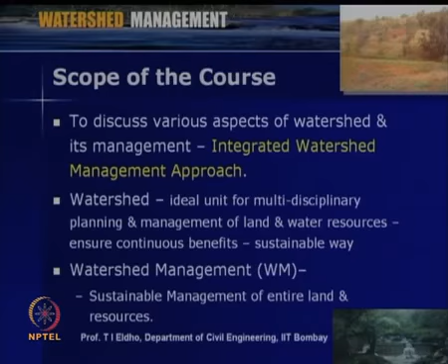A watershed is an ideal unit for multidisciplinary planning and management of land and water resources, so that the various management practices ensure continuous benefits in a sustainable way. This watershed is a geographical area which we can delineate as per the topography, and that is the basis of the various management practices of the water, land and other resources in that area.

When we talk about watershed management, we will be discussing in the perspective of sustainable management. Sustainable management means all the resources available in the watershed will be managed in a way that it will be useful for the present generation and the future generation. Hence, it is the management of all the resources within the watershed.

Now coming to the course objectives. The various course objectives are listed here. To discuss various aspects of watershed development and management. That means the resources within the watershed, its technological, social, ecological, environmental, sustainable management issues in a holistic way. That is the main objective of this course.

The main focus will be the various technical aspects of watershed management. The main emphasis will be on the perspectives on land and water management. We will be discussing the various complex issues within a watershed and analyze the issues, and we will be discussing the specific knowledge related to various issues of the watershed and its management in a holistic way.

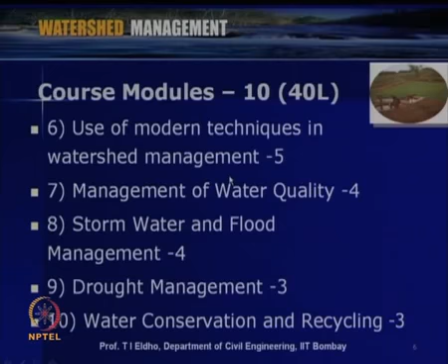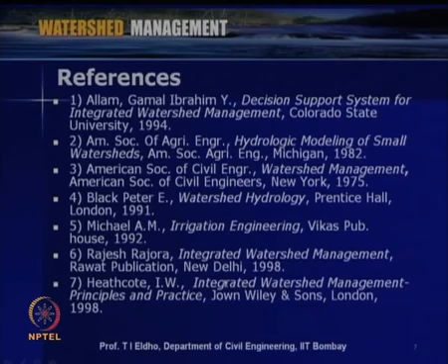For the preparation of this video lecture, a number of reference books, journal papers and internet resources will be used. Some of the important references are listed here, which include Decision Support System for Integrated Watershed Management by Allam Gamal Ibrahim, Hydrologic Modeling of Small Watersheds by American Society of Agricultural Engineers, Watershed Management by American Society of Civil Engineers, Watershed Hydrology by Black Peter, Irrigation Engineering by A. M. Michael, Integrated Watershed Management by Rajesh Rajora, Integrated Watershed Management by Heathcote, then Watershed Management by J.

V. S. Murthy, Watershed Management and Sustainable Development by Gopal Iyer and Roy, Watershed Development in India by Purandare and Jaiswal, Watershed Management, Planning and Management by Veer Singh Raj, and Watershed Processes, Assessment and Management by Paul A. DeBarry. So, these are some of the important references which will be used in the preparation of these lectures, and some other references will be mentioned at appropriate places whenever we discuss some issues.

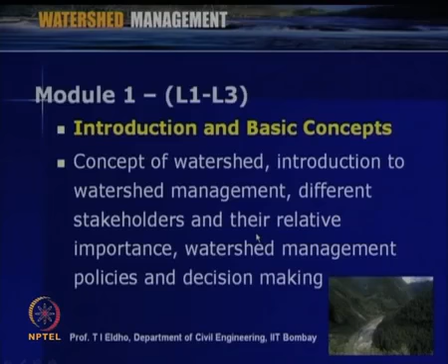So, today we will be starting the first module. The module is on introduction and basic concepts. In this first module there will be 3 lectures, and the contents will be on the concept of watershed, introduction to watershed management, different stakeholders and their relative importance, watershed management policies and decision making. The first lecture we will be discussing today.

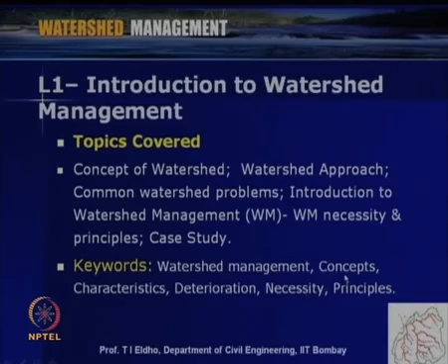So, the first lecture is on introduction to watershed management. Today we will be discussing the following topics: the concept of watershed, watershed approach, common watershed problems, introduction to watershed management, watershed management necessity and principles, and we will be discussing a case study with respect to these topics. Some of the important keywords for today's lecture include watershed management concepts, characteristics, deterioration, necessity and principles.

So, first we will be discussing the concept of watershed. Watershed, as I mentioned, is a geographical area which is identified topographically, say surrounded by ridges, and the water falling on that area will be draining to a single outlet as in a river or a lake. So, when we discuss the watershed in a holistic way, we have to discuss the various issues, what is happening with respect to the land, water and various resources within the watershed.

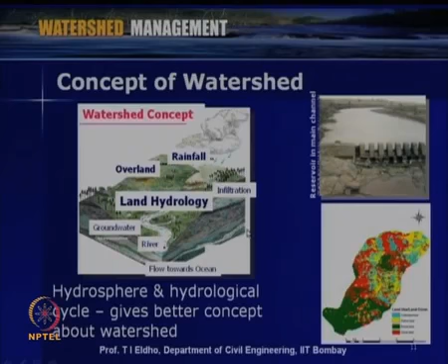As you can see, in this watershed various land use and land cover patterns are shown with various colors: agricultural land use, forest land use, shrub and various other kinds of land uses. So, when we discuss the watershed, we have to mainly see the various resources like land, water, mineral and other resources within the watershed. Water is an important aspect as far as a watershed is concerned, so we have to discuss watershed management mainly within the perspective of water.

So, we will be discussing the hydrosphere and hydrological cycle within the perspective of this watershed, which gives a better concept of the watershed. As defined here, the hydrosphere in physical geography describes the combined mass of waters found on, under and above the surface of the planet. The hydrosphere consists of waters of land, rivers and other water bodies, including the groundwater system, and also the oceans, atmosphere and surrounding the land.

So, when we discuss the water resources within a watershed, we have to see the surface water, groundwater and what is happening to the water resource within the watershed which we consider. That way we have to consider the hydrological cycle. Hydrological cycle means a change in phase of water in the hydrosphere. Due to precipitation, water is falling on the ground or the watershed which we consider.

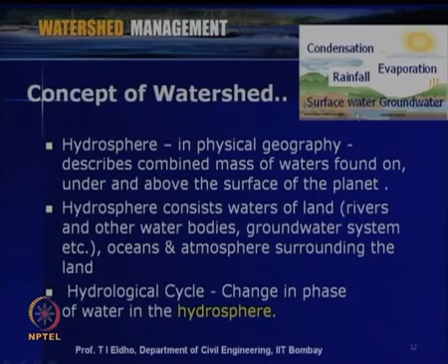So, finally, evaporated water will be condensed and finally come back again to the system, say the watershed, which we consider as rainfall, and it will be repeated as a hydrological cycle. So, when we discuss the management of water within a watershed, we have to see the various phase changes happening within the watershed, like precipitation to runoff, and during that the various processes like interception, evaporation, infiltration, and finally runoff from the outlet of the watershed. So, the various issues related to water we will be considering in a holistic way within the watershed.

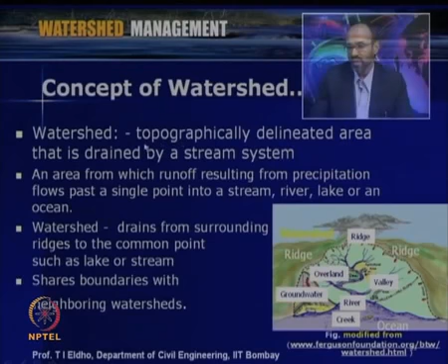So, coming back to the basic definition of the watershed. As I already mentioned, a watershed is a topographically delineated area that is drained by a stream system. You can see that a watershed is typically represented here in this figure. This is a ridge, here another ridge, and this is a major stream or river. Whatever precipitation falls on this watershed area is transformed to runoff, and finally that will be coming to the river, and that we can consider as the outlet of this watershed.

So, a watershed is an area from which runoff resulting from precipitation flows past a single point into a stream, as shown in this figure, into a stream, river, lake, or it can be to the ocean. So, the water falling on the watershed as precipitation, it can be rainfall or snowfall, drains from the surrounding ridges to common points such as a lake or stream.

So, when we consider the geographical area of the watershed, this area we are delineating as a watershed. It is of course bounded by other watersheds. You can see that this is the watershed which we now consider, but surrounding it on this side is another watershed, and on this side another watershed. So, the watershed which we consider shares its boundaries with neighboring watersheds. We are separating the watershed as a scientific unit for the various resource managements which we consider. So, that is the basic concept of watershed management.

So, now before going to further details of the watershed and its management, we have to understand the basic characteristics of a watershed, since watershed management practices depend upon the characteristics. So, we should have a fundamental understanding of the characteristics of the watershed. Some of the important watershed characteristics I have listed here. The first one is the size of the watershed, the second one is the shape of the watershed. Size means it can be a larger watershed or a smaller watershed depending upon the area we consider. Shape means, generally, naturally it will be an irregular shape. The shape can be broad, elongated, or narrow. So, different shapes are possible.

Then the third important watershed characteristic is the physiography, or the physical geography. So, you can see how the land is changing, whether the watershed considered has hills, plain area, or sloping area. So, the physiography is very important. Then some other important characteristics include climate. As I mentioned, we will be discussing the various resources within the watershed, and one of the important resources is water. So, climate issues like the rainfall pattern within the watershed, the temperature pattern and temperature changes, and how rainfall changes to runoff, all those issues we will be discussing under the climate issues related to the watershed.

And then finally, another important issue as far as watershed characteristics is concerned is socioeconomics. So, for the holistic development of the watershed area which we consider, we have to see the socioeconomics of the people residing within the watershed. So, we have to study in detail how is the socioeconomics of the watershed area which we consider.

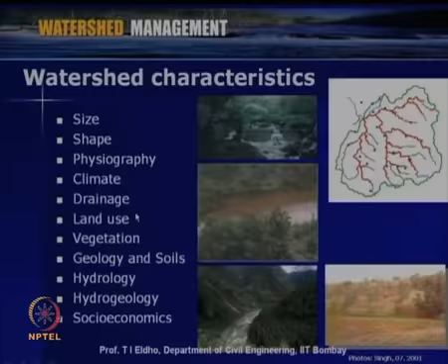So, these are some of the important watershed characteristics which we have to consider before going for any watershed management practices. So, all these various characteristics we will be discussing in detail in various lectures. So, before going to other issues, let us initially look into the size of watershed. The other characteristics like shape, physiography and others we will be discussing in other lectures. So, today let us have a brief discussion on the size of the watershed.

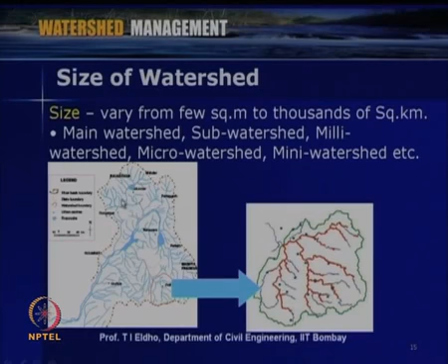So, when we go for watershed management practices, the size is important, whether it is a very large watershed or a small watershed. So, a watershed size can vary from few square meters to thousands of square kilometers. So, as shown in this slide, there can be a major watershed of thousands of square kilometers, and then depending upon the drainage system, the orders of various streams, we can further consider this main watershed into sub watersheds. So, say for example, this is the main watershed, then this is a sub watershed. So, the sub watershed considered is a part of this watershed.

So, we can start the various management practices by considering a sub watershed also, and then depending upon the area of the watershed, we can further classify milli watershed, micro watershed or mini watershed, considering the area of a small watershed, very small watershed, like that for the given major watershed.

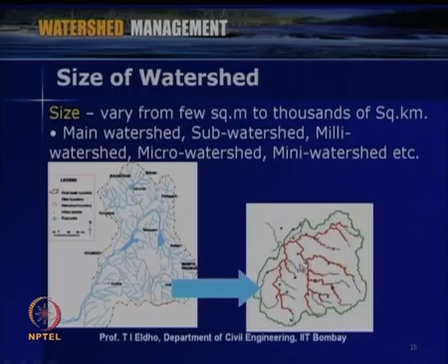So, as I mentioned, when we consider the watershed, there will be other watersheds as boundaries. So, say for example, if you consider this watershed, this is the ridge of this watershed, and then this is the major stream, and other minor streams of different orders will be joining the major stream. So, this is the watershed which we consider, which is a sub watershed of the main watershed which we consider here.

So, now what we have discussed is the concepts of watershed. So, we have seen that we have to consider the important watershed characteristics, that is very important before considering any management practices for the watershed which we consider. So, now we will discuss about the watershed approach. So, as we have seen, this watershed is a scientific area which is delineated based upon the topographical features of the area which we consider.

So, the watershed area is very appropriate for various planning, management, implementation and the further sustainable development of the area. So, the watershed approach is appropriate to solve various resources problems, whether the land which we consider, the water we consider or various other resources, for planning, implementation and management.

So, as we discussed, on a watershed scale it is much easier to manage the land and water, so that we can manage the system in a sustainable way, in an environment friendly way, so that we can have better management financially as well as socially. So, here when we discuss about the watershed management, the environmental issues are very important for the considered area.

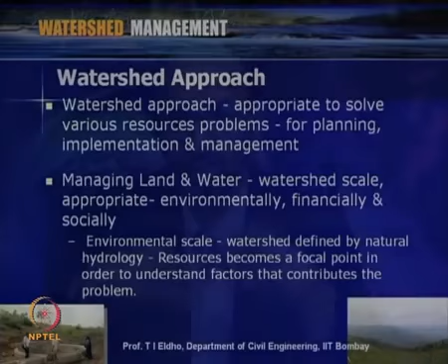So, when we consider the watershed management on an environmental scale, the watershed is defined by natural hydrology as an ecosystem, and whatever the resources within the watershed becomes a focal point in order to understand the factors that contribute to the environmental problem or the ecological problem for the watershed considered.

So, when we consider the watershed management, it is the issue of sustainable development and management. So, we have to discuss the various issues like financial issues, social issues, so that we have the optimal benefits for the area which we consider. So, the core of watershed approach is better understanding of various factors or various resources within the considered watershed.

So, when we go for watershed management practices, we have to consider various issues. So, we may have to go for modeling of various systems within the watershed, then monitoring the system when we implement, and then reporting under a watershed framework.

So, we go in a scientific way as far as the watershed management is concerned, so that we can save time and we can utilize the available resources or available money in a better way, so that optimal management is achieved. So, when we discuss about the watershed management, one of the important issues is of course the people participation.

So, the people residing in that watershed are very important. We have to consider the various issues they are facing in the considered watershed. So, people participation is the pillar of the watershed approach, so that the various management practices which we consider for the watershed are for the people and for the holistic development of the area.

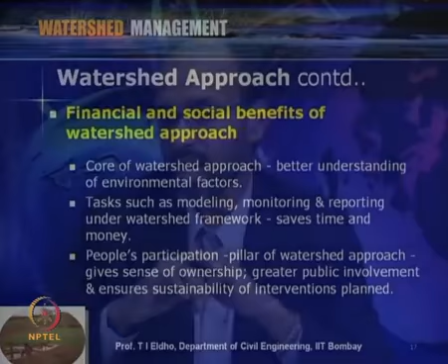So, when we consider the people participation, it gives a sense of ownership. So, greater public involvement will be there, and that ensures sustainability of the interventions which we plan within the watershed management perspective.

So, generally what happens is uncontrolled, unplanned and unscientific land use; that is a major issue as far as a watershed is concerned. So, for example, if we consider the agricultural land within the watershed, then the various practices followed by farmers, if they are not scientific, if they are not appropriate for the land or the watershed which we consider, then there will be problems or deterioration happens to the watershed.

Then watershed erosion, like due to the various faulty land management practices, there can be soil erosion, and then the top fertile soil will be eroded away from the watershed. So, that will make the soil unfertile. Then some of the issues like shifting cultivation by the farmers. So, that also can be an issue as far as agricultural land is concerned.

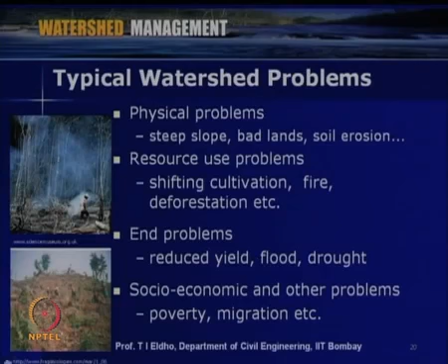So, what we have discussed so far is the concept of watershed, then watershed deterioration and its consequences, and, when we consider a typical watershed, what the typical problems are. So, when we discuss these typical problems, we have to see what the watershed related complications are. So, some of the complications are listed here.

So, mainly the complications can be on two issues: one is land related issues and the second is water related issues. So, the land related issues are the issues due to human interventions within the watershed, like, as we discussed, the changing of the contour of land and land use, and then various pollution problems within the watershed.

So, some of the remedies can be appropriate land management, then appropriate waste management, so that we can stop pollution at sources, and then reduced use of fertilizers, herbicides and pesticides for various agricultural uses. So, like that, depending upon the watershed, there can be various remedies.

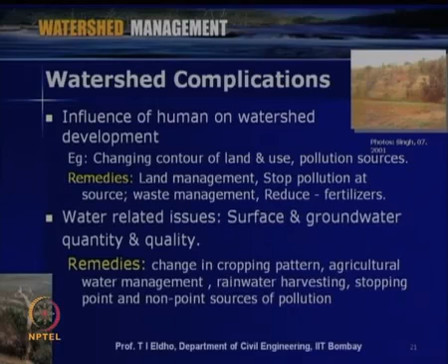So, within watershed management practices, we can look into various issues like appropriate agricultural water management practices, rainwater harvesting, the change in cropping pattern, and of course some other important issues like pollution problems and environmental problems, such as soil pollution and water pollution. So, we can look into the pollution issues as far as water and land are concerned, so that we can achieve better environmental management.

So, within this perspective, we have seen in the previous slide the watershed complications and their remedies. So, now coming back to watershed management, why do we have to go for watershed management? What is the necessity of watershed management? So, some of the important necessities of watershed management are listed here.

The watershed which we consider is a specified, scientific area. So, we are looking for the better management of various resources within that area. So, within that perspective, when we look into the necessity of watershed management, the necessities include better water and land management. So, we are looking for the best management practices.

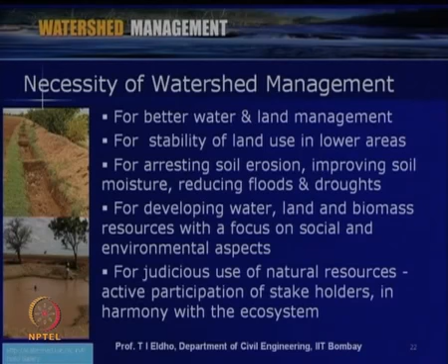Then another necessity is for developing water, land and biomass in an integrated way, so that we achieve the social needs and environmental needs in a sustainable way. Also, the watershed management necessity can be for judicious use of natural resources in a holistic way. So, within this perspective of watershed management, we have to see the harmony of various players within the watershed, like the people within the watershed, then the flora and fauna, and the harmony within the ecosystem for the watershed which we consider.

So, now we will look into the important principles of watershed management. Some of the important principles are listed here. In watershed management, we consider the utilization of the land according to the capability of the land, then maintain adequate vegetative cover for control of soil erosion. We have seen soil erosion is a major problem. Then we look into the conservation of rainwater at places where it falls. This can be like contour farming, as shown in this figure.

Then draining out of excess water with a safe velocity, so that we can avoid soil erosion, and storing it at an appropriate location, like in a pond, so that we can use the water in future. Then preventing erosion, so that we are stopping the water at different locations. So, recharge to the groundwater system will be improved, and we will have better availability of groundwater for the watershed which we consider.

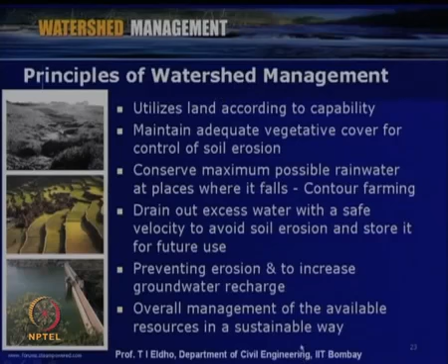And finally, overall management of the available resources in a sustainable way. This is the most important principle of watershed management: various resources like land, water, forest, minerals, all the resources available within the watershed, managed in a sustainable way. So, these are some of the important principles of watershed management.

So, now in this lecture we have seen the concept of watershed, then the watershed approach, the various issues which we consider for sustainable and environmentally friendly development. Then we have seen watershed related problems like watershed deterioration, and the consequences of watershed deterioration. Then we have seen the necessity of watershed management practices, and the important principles of watershed management. As I mentioned, we are looking at the management of various resources within a watershed in a holistic way, so that we achieve sustainable development for the watershed.

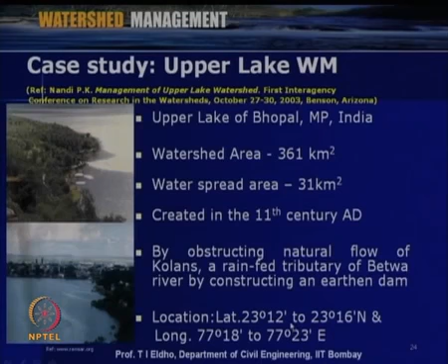This lake was created in the 11th century by obstructing the natural flow of Kolans, a rainfed tributary of the Betwa river, by constructing an earthen dam. This shows the lake considered for this watershed. It is located at latitude 23 degree 12 minutes to 23 degree 16 minutes and longitude 77 degree 18 minutes to 77 degree 23 minutes east. As we discussed, the size of the watershed is important. This is a sub watershed of the so called Upper Lake, and the area is about 361 square kilometer.

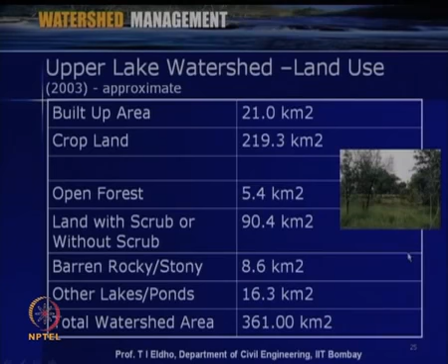So, when we look into the watershed management for the area which we consider, we have to consider the watershed management in a holistic way. So, first one is the land, then the water in the land, and then of course, various resources within the watershed. So, anyway, in this case study the main issue was the water related issue.

So, some of the important information as far as this watershed case study is concerned. This lake which we consider in this watershed is the lifeline for various farmers and fishermen. About 500 families are there in this watershed. The principal source of potable water for the city of Bhopal is from this lake, for about 1.5 million people.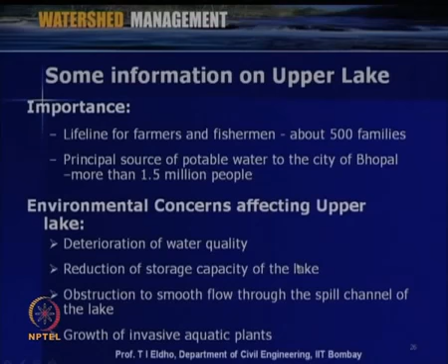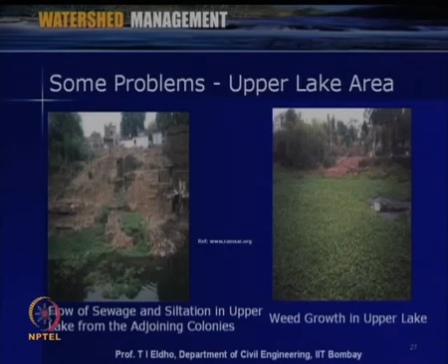So, water available in the lake was not good, then reduction of storage capacity of the lake, the issues like weed growth, and then polluted water were some of the major issues. Then obstruction to smooth flow through the spill channel of the lake. So, the drainage system for the watershed was not proper. Then growth of invasive aquatic plants were there for this watershed, that you can see here. So, these were some of the important issues before implementing these watershed practices for this upper lake area.

So, due to the various problems for this upper lake area, a scientific study has been carried out in the 1990s, and then by the Ministry of Environment and Forest, Government of India and state governments some plans were put for this watershed area in the late 1990s, and then they designated an area called Bhoj wetland along with the lower lake area downstream of the upper lake, and the initiation of this project was by the Ministry of Environment and Forest and the state government authorities.

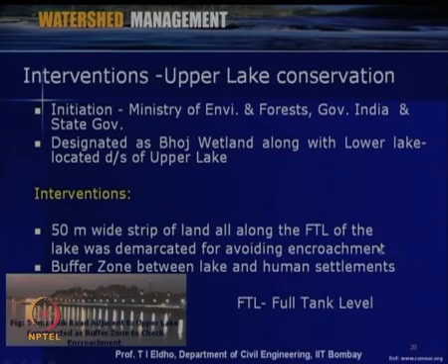So, some of the interventions within the watershed perspective, water related issues, are mentioned here. So, this includes a 50-meter wide strip of land all along the full tank level of the main lake. This was demarcated for avoiding encroachment. Then a buffer zone has been created between the lake and the human settlements within that watershed. So, these were some of the important interventions in this watershed.

Also, intensive plantations were implemented in this buffer zone. About 73 check dams across 28 inlet channels were implemented in this watershed. So, all these were done at the end of the 1990s, and the effect of these interventions was studied in 2003 by Nandi in this paper.

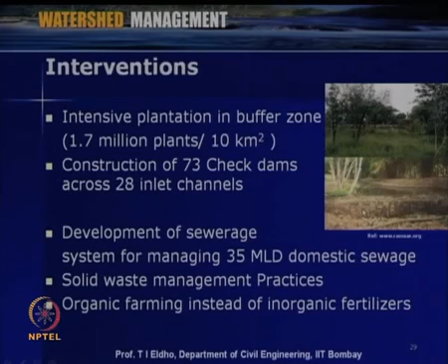And also as we discussed, some of the other issues were the pollution problems. So, development of an appropriate sewage system was done for this area, so that pollution management has been done. Also, appropriate solid waste management practices were carried out for this area, and also organic farming instead of inorganic fertilizers was implemented in this area.

Another important aspect of this case study is stakeholder participation. So, due to the concentrated efforts of various officials and NGOs in this area, well coordinated awareness programs were carried out. Then the reforestation of the watershed area through participation of farmers, local people, schools, colleges, and city administrations was carried out in this area, and then organic farming was also promoted among the farmers.

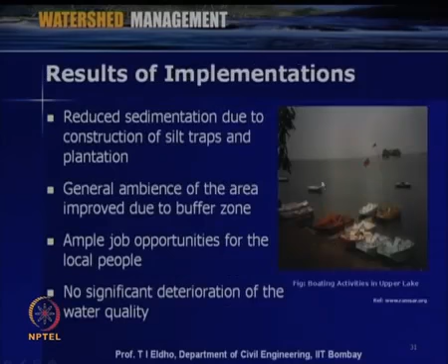So, when this case study was analyzed in 2003, some of the results of implementation as reported are listed here, after 5 years of implementation of various interventions. So, results of implementation are reduced sedimentation due to construction of silt traps and plantations, then improvement in the general ambience of the area due to the buffer zoning.

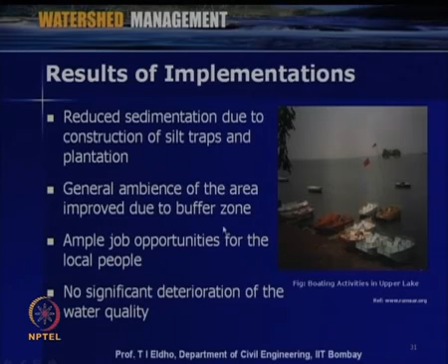Then some of the important lessons from this case study are listed here. Like the necessity of an integrated watershed approach. As I mentioned, for this case study, the management of the land, then water, then the various issues for the people, all these are considered. Then importance of conservation practices, like the necessity of a buffer zone. That has improved very much for the lake considered in this area.

Then overall environmental management, the necessity of a legal framework to control anthropogenic activities. This lake was destroyed due to various human activities within the watershed. So a legal framework has also been established by the various government bodies during the implementation of this watershed scheme. Then necessity of long term management plans. This program was implemented not on a short term basis, but a long term basis.

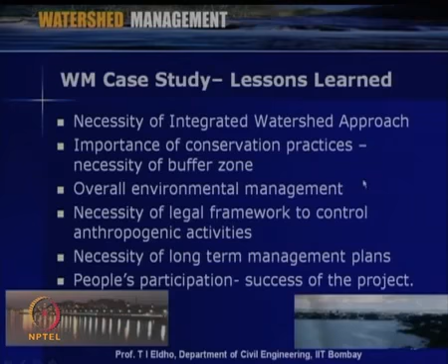And another important aspect which I want to emphasize here is people participation. The farmers, the schools, colleges, the various government organizations, all the people came together and participated in the overall management of this upper lake area. That was actually the success of this project, as we have seen the effects of the watershed management practices done in upper lake. So with this, the basic concepts of the first lecture, introduction to watershed management, are over.

Before closing the lecture, some of the tutorial assignment problems related to this lecture are listed here. First, some tutorial questions. Most of these answers are already discussed in the slides. I have listed 4 questions here. First one is: discuss the watershed concept within the perspective of holistic development of an area. This we have already seen. We have to see not only the land, but water and other resources, in a holistic way.

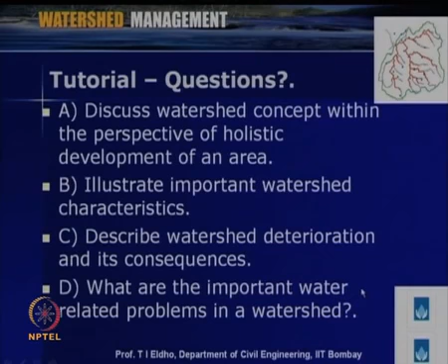Second question is: illustrate important watershed characteristics. We have seen various characteristics like size, shape, hydrological aspects, climate aspects, issues we have to consider in watershed management practices. Then: describe watershed deterioration and its consequences. We have already discussed the typical problems related to watershed deterioration, and that it may lead to droughts, floods or poverty. Fourth question is: what are the important water related problems in a watershed. Various issues we have already discussed.

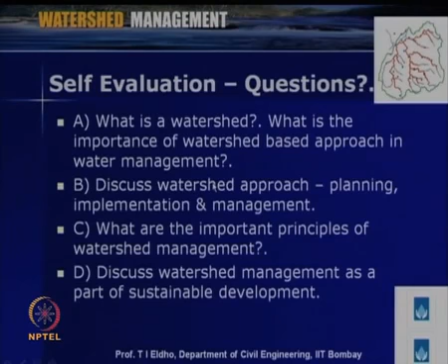For those going through this lecture, some self evaluation questions are listed here: what is a watershed and what is the importance of a watershed based approach in water management. Second: discuss watershed approach, planning, implementation and management. Third: what are the important principles of watershed management. Fourth: discuss watershed management as a part of sustainable development. All these we have already discussed in various slides in the lecture.

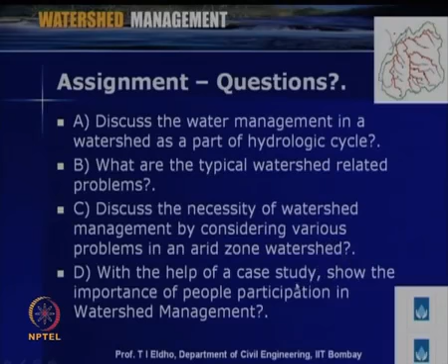Then last question is: with the help of a case study, show the importance of people participation in watershed management. We have already seen one case. Similarly, other cases can be analyzed.

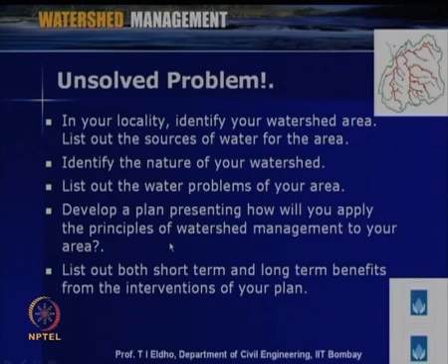As a last slide, one unsolved problem is put here for the listeners. In your locality, identify your watershed area, list out the sources of water for the area, identify the nature of your watershed, list out the water problems for your area, then develop a plan presenting how you will apply the principles of watershed management to your area, then list out both the short term and long term benefits from the interventions of the watershed management plan. Within the perspective of the issues we have discussed, you can prepare this for the watershed you consider.

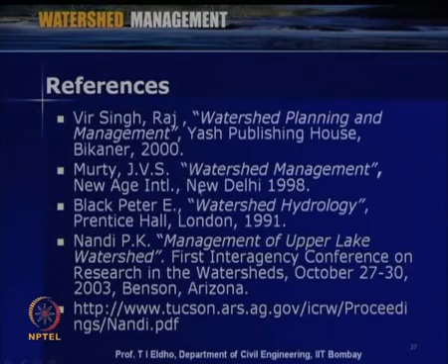Some of the important references used specifically for this lecture are listed here. In this introductory lecture, we have seen the basic concepts of watershed, the necessity of watershed management, principles of watershed management, and also a case study related to various issues of watershed management.